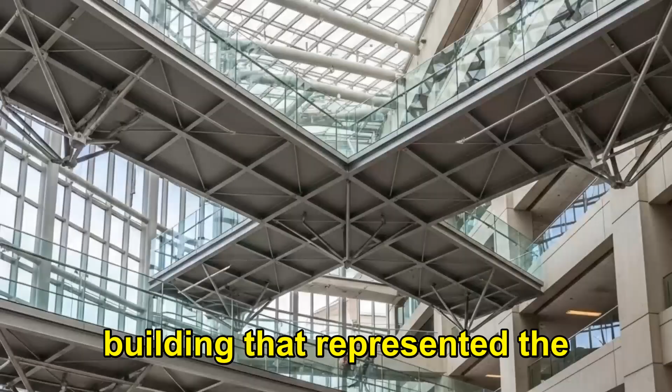The air inside the Hyatt Regency atrium in Kansas City was thick with the sounds of a big band orchestra and the rhythmic shuffling of over 1,600 people dancing. It was July 17, 1981, a Friday evening where the city's elite and everyday citizens gathered for the weekly tea dance. The atmosphere was electric, a celebration of modern elegance in a building that represented the pinnacle of late 70s architectural ambition. But in a single heartbeat, the music was replaced by a sound so violent and alien that survivors would later describe it as a lightning strike inside a closed room.

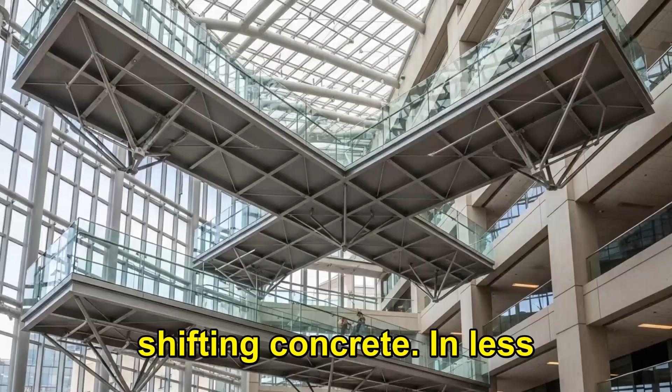A deafening metallic pop followed by a low guttural roar of shifting concrete. In less than 10 seconds, two massive steel and concrete skywalks, weighing tens of thousands of pounds, tore away from their moorings and plummeted into the crowded lobby below. The sheer violence of the collapse was unprecedented. It didn't just fall, it obliterated everything in its path, turning a scene of joy into a wasteland of twisted rebar, grey dust and shattered glass.

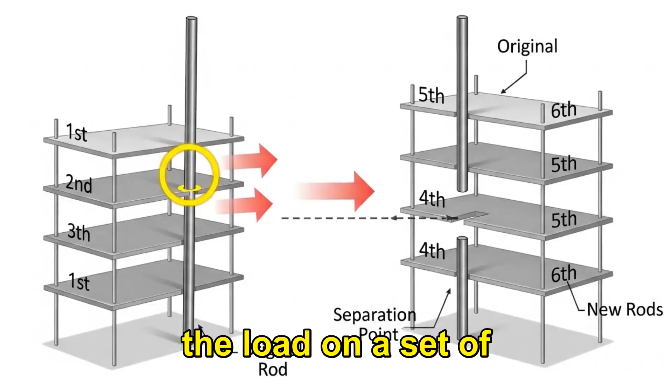We are starting today with the most horrific structural failure in United States history prior to the 2001 attacks. But what we will discover by the middle of this video is even more chilling. The catastrophe wasn't caused by a massive earthquake, a terrorist bomb, or a freak of nature. It was caused by a simple 1-inch change to a technical drawing, a change so seemingly insignificant that it was approved over a casual phone call. Yet it effectively doubled the load on a set of steel nuts that were never designed to hold it.

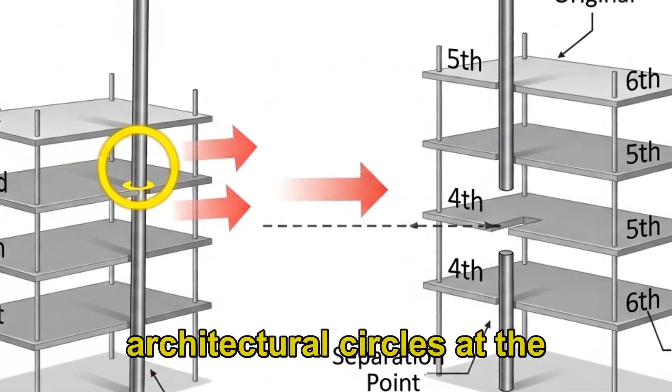The Hyatt Regency was not just a hotel, it was a $50 million statement of intent, a monument to the urban square concept that was sweeping through architectural circles at the time. To put that $50 million in perspective, in today's economy, you are looking at a construction cost exceeding $170 million.

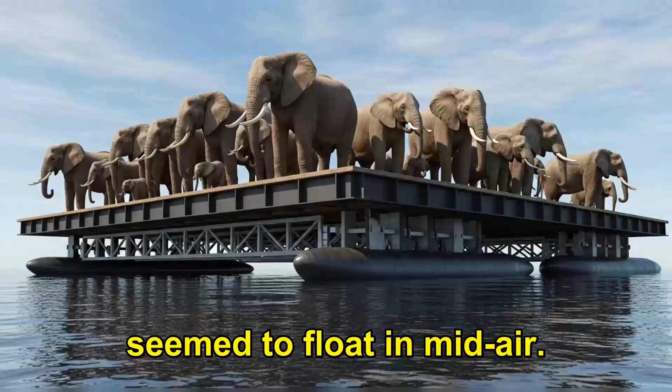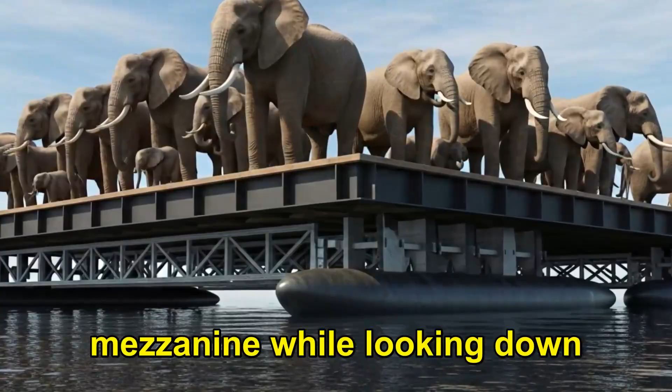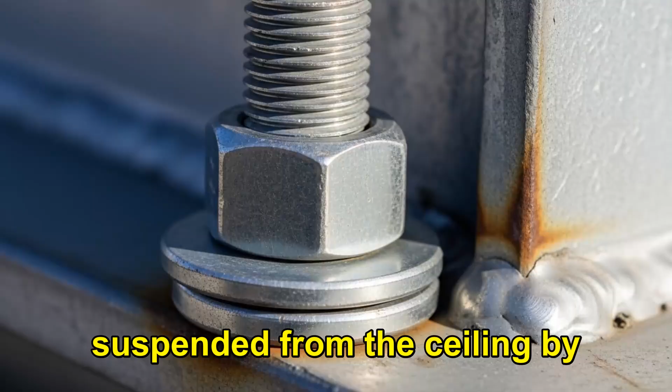Completed in 1980, the hotel featured a staggering 40-story guest tower and a sprawling sun-drenched atrium that acted as the heartbeat of the complex. The crown jewels of this atrium were the three skywalks, marvels of suspension engineering that seemed to float in mid-air. These weren't just narrow corridors, they were 120-foot long, 12-foot wide bridges of steel and concrete designed to allow guests to transit between the tower and the mezzanine while looking down at the spectacle below. To visualize the scale, each of these walkways was roughly the length of 3 standard school buses parked end to end. They were suspended from the ceiling by a series of 1.25-inch diameter steel hanger rods, which looked like thin, elegant needles compared to the massive volume of the space they occupied.

The engineering specifications were, on paper, breathtaking. The second, third and fourth floors were connected by these bridges, which were offset to create a sense of dynamic movement within the 50-foot high atrium. The total weight of the fourth-floor walkway alone was approximately 64,000 pounds. That is the equivalent of 15 fully grown African elephants hanging by threads of steel.

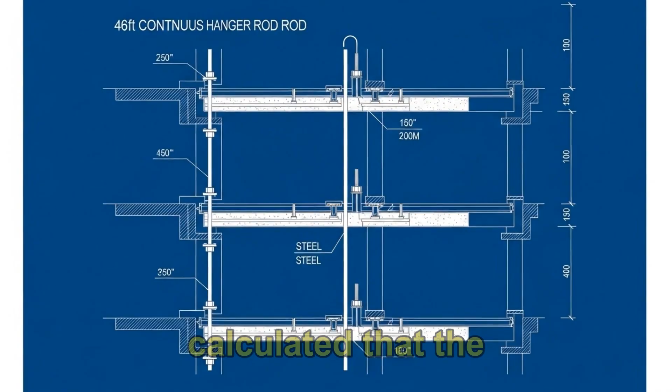When you add the weight of several hundred people standing on those walkways to watch the dancers below, the load capacity requirements become astronomical. Engineers calculated that the steel rods needed to have a yield strength capable of supporting not just the dead weight of the concrete and steel beams, but the live load of a moving, dancing crowd. The public saw a futuristic open-concept masterpiece. The engineers saw a complex web of tension and compression, where every bolt and every weld had to fight against the relentless pull of gravity.

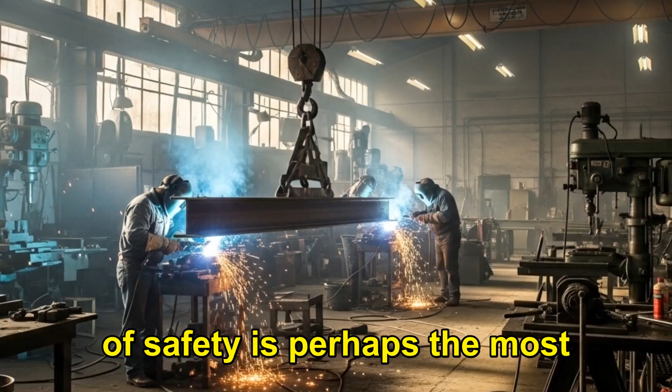Shattering the assumption of safety is perhaps the most difficult part of this story. We often walk into modern skyscrapers, airports and hotels with an implicit trust in the invisible hands of the engineers who built them. We assume that because a building is open to the public, it has survived the most rigorous scrutiny humanly possible. The Hyatt Regency was no exception.

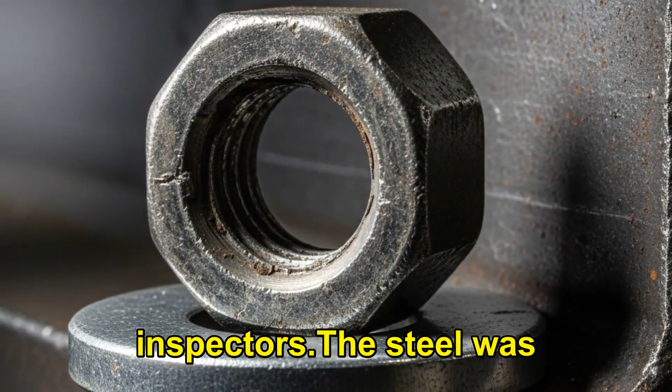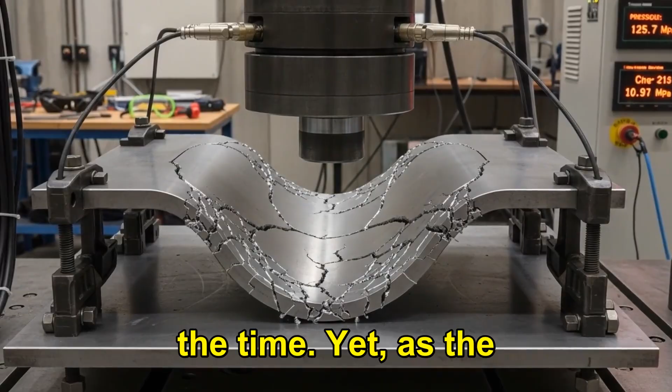It was designed by GCE International, a respected firm with a history of successful projects. It was constructed by Eldridge Construction, a company known for its reliability. The blueprints were reviewed by city inspectors. The steel was certified, the concrete was tested, it was a Class A facility, a flagship for the Hyatt brand, and it had been operating for a full year without a single tremor of concern. The tragedy of the Hyatt Regency is not that it was a cheap or shoddy build in the traditional sense, it was a high-end, professionally managed project that met every legal requirement of the time. Yet, as the band played on that Friday night, the structural integrity of the fourth-floor walkway was already failing.

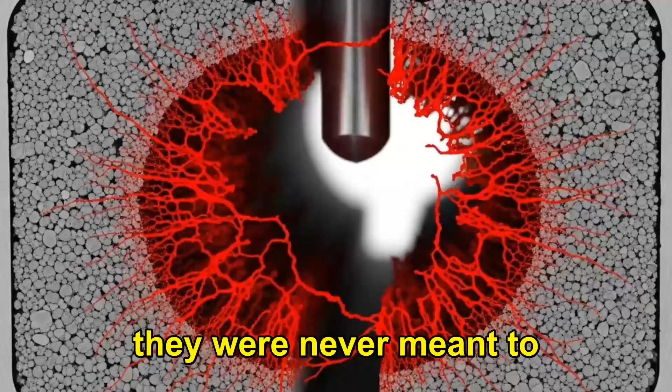The steel hanger rods were quietly screaming under a stress they were never meant to handle, and the legal and certified nature of the building was about to be proven irrelevant in the face of a fundamental law of physics that had been ignored in a draft room hundreds of miles away.

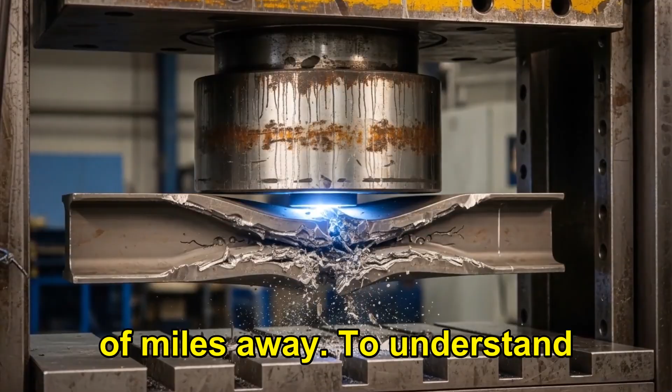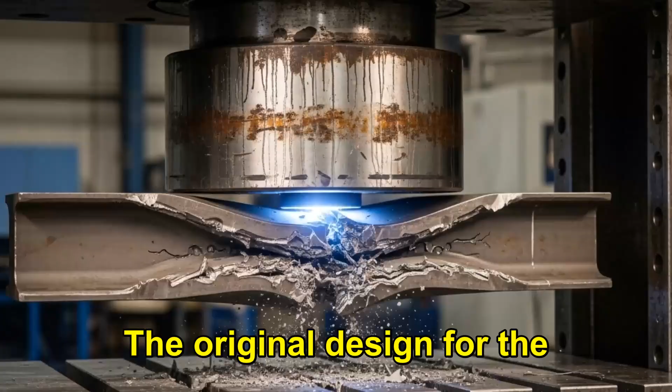To understand why the Hyatt Regency collapsed, we have to look past the velvet curtains and the sparkling chandeliers and peer into the blueprints of the Jack D. Gillum & Associates engineering firm. The original design for the skywalks was elegant in its simplicity.

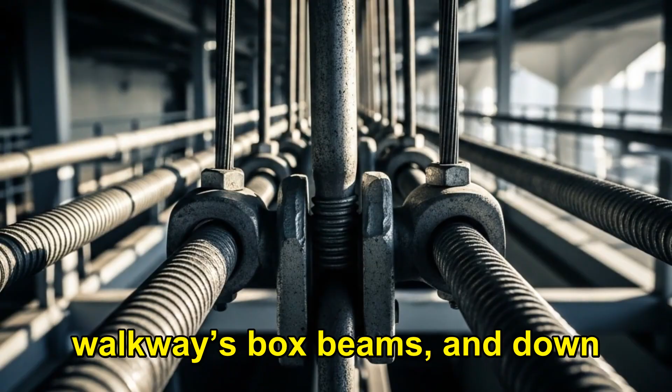It called for a single set of continuous steel hanger rods, each 46 feet long, to run from the ceiling of the atrium straight through the fourth-floor walkway's box beams and down to the second-floor walkway. In this configuration, the fourth floor and second floor walkways were essentially independent passengers on the same rod. Each walkway would only transmit its own weight to the rod.

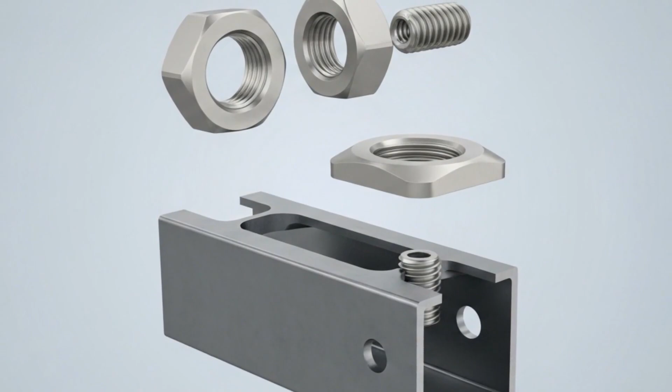It's like two people holding onto a vertical rope at different heights. The rope feels the total weight, but the person at the top isn't supporting the person at the bottom with their own hands. This design met the Kansas City building codes, which required a load-bearing capacity of 151 kilonewtons, roughly the weight of a mid-sized bulldozer, on each connection.

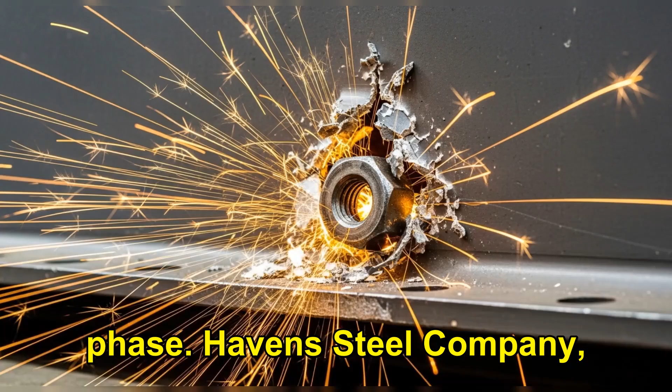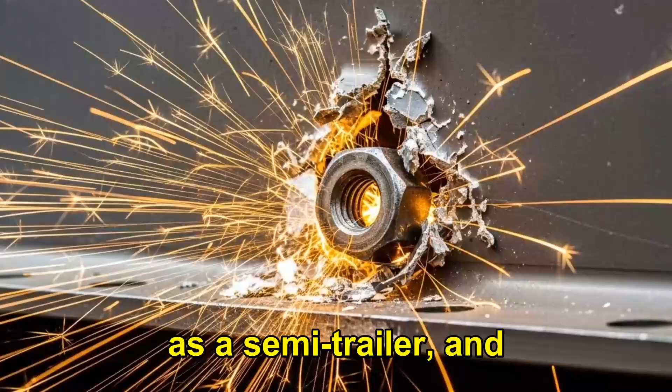However, a massive logistical hurdle emerged during the fabrication phase. Havens Steel Company, the contractor responsible for the steelwork, realized that manufacturing and transporting 46-foot-long threaded rods was a nightmare. These rods were nearly as long as a semi-trailer, and threading the entire length to allow the fourth-floor walkway to be bolted in place was deemed impractical and prone to damage during transit.

Havens Steel proposed a minor modification. Instead of one continuous rod, they would use two separate sets of rods. One set would connect the ceiling to the fourth-floor walkway, and a second set would connect the fourth-floor walkway to the second-floor walkway. To a layman or even a rushed engineer, it seemed like a distinction without a difference.

They believed the total load on the ceiling remained the same. What they failed to realize was that they had fundamentally changed the physics of the connection. Under the new double-rod system, the fourth-floor walkway was no longer just a passenger, it became a middleman.

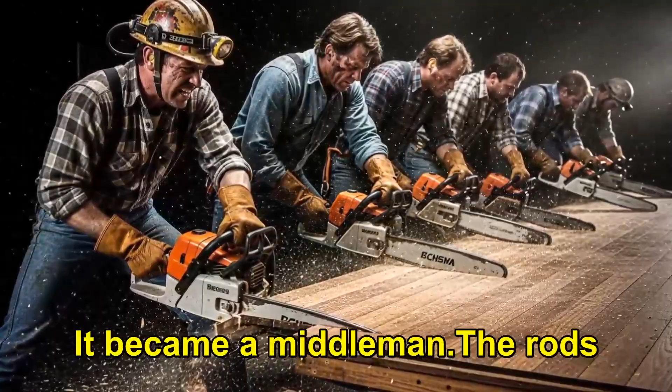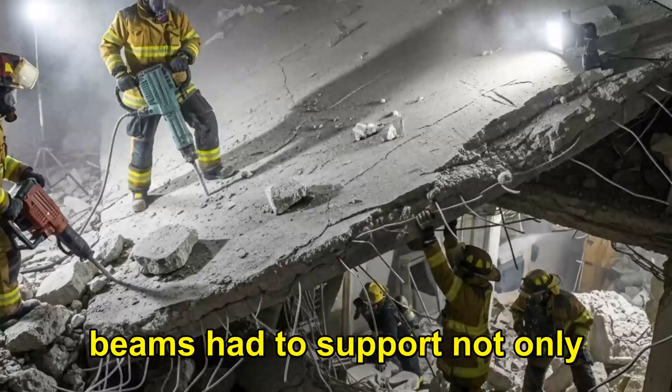The rods supporting the second floor were now bolted directly to the box beams of the fourth floor. This meant that the fourth floor beams had to support not only their own weight and the weight of the people on them, but also the entire weight of the second floor walkway hanging below them. By making this change, the engineers inadvertently doubled the stress on the fourth floor connection.

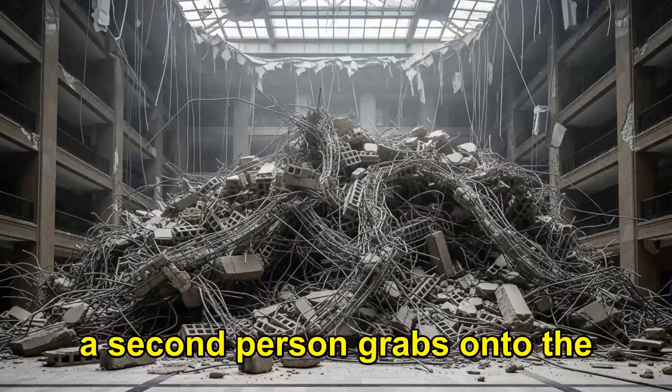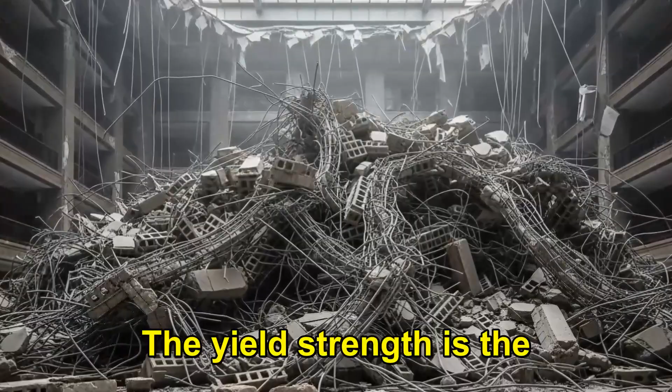Imagine a person hanging from a ceiling bar, and then a second person grabs onto the first person's ankles. The first person's grip now has to hold two bodies instead of one. In engineering terms, the load capacity of the connection was pushed far beyond its yield strength. The yield strength is the point at which a material stops acting like a spring and starts acting like modeling clay. It deforms permanently and eventually snaps.

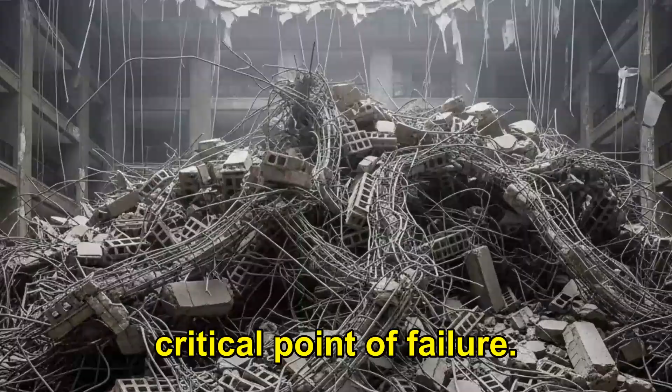The box beams themselves were a critical point of failure. These were not solid blocks of steel, they were built-up members created by welding two C-shaped steel channels together toe to toe. To visualize this, imagine taking two staple removers or two U-shaped pieces of metal and taping their open ends together to form a hollow square.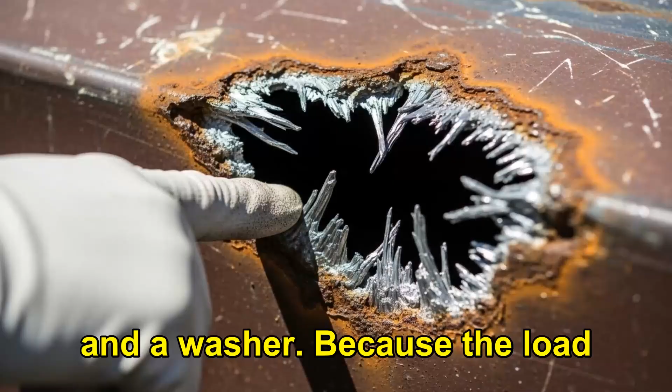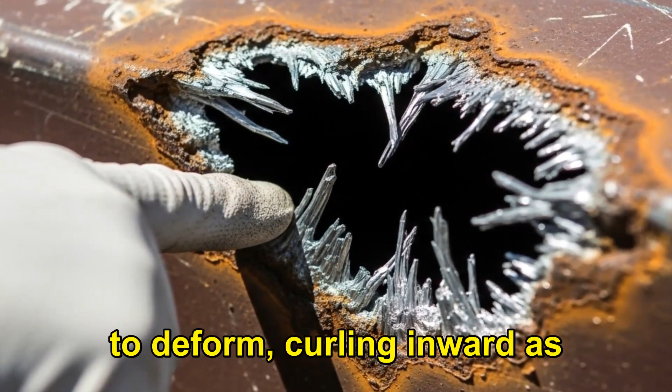The hanger rods pass through a hole drilled in the center of these welded beams, secured by a nut and a washer. Because the load was now doubled, the stress at the point where the nut pressed against the beam was catastrophic. The steel started to undergo local buckling. The bottom of the box beam began to deform, curling inward as the nut literally tried to pull itself through the steel plate. This is what we call shear force, the tendency of one part of a structure to slide past another.

What makes this even more tragic is the chain of human decisions. This design change was communicated via a phone call and a few revised sketches. It was never formally recalculated.

The lead engineer, Jack Gillum, later testified that his firm did not perform the math on the revised design because they assumed the fabricator, Havens Steel, had already checked it. Conversely, Havens Steel assumed that since the engineers approved the change, it was safe. It was a classic not-my-job loop that left a ticking time bomb in the hotel atrium.

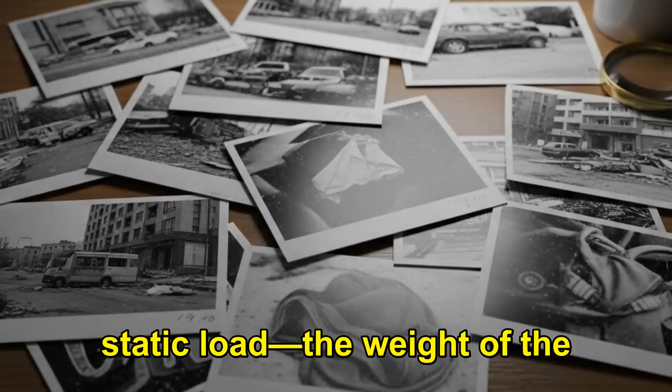During the final construction, the connection was so weak that it barely met 30% of the required safety code for a static load, the weight of the bridge alone. When the live load of the dancing crowd was added, the angle of inclination of the stress changed, and the metal began to fatigue instantly.

We're talking about a structure that was essentially failing from the moment it was finished, held up only by the narrowest margin of structural integrity. The first warning sign wasn't a crack or a groan, it was the subtle, invisible bending of steel that had already reached its limit before the first guest even checked in.

At exactly 7:05 p.m., the structural tension that had been building within the fourth-floor skywalk reached its breaking point. For the 1,600 people in the lobby, the first sign of the apocalypse was not a visual one, but a sound. A sharp metallic crack that echoed through the six-story atrium like a gunshot from a high-caliber rifle. This was the sound of the steel box beam finally surrendering.

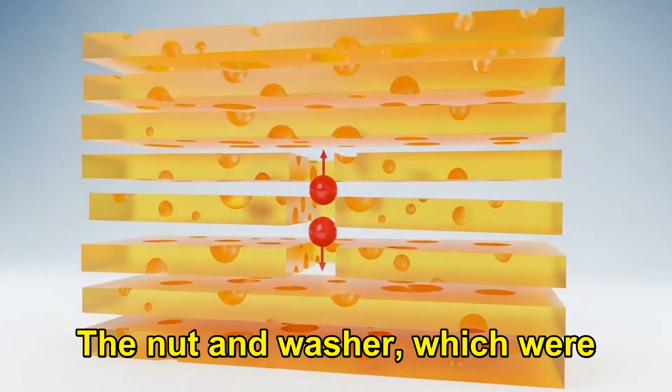The nut and washer, which were meant to hold the weight of two bridges, literally tore through the bottom flange of the fourth-floor beam. In the world of structural engineering, this is known as a pull-through failure, and once it began, there was no stopping it.

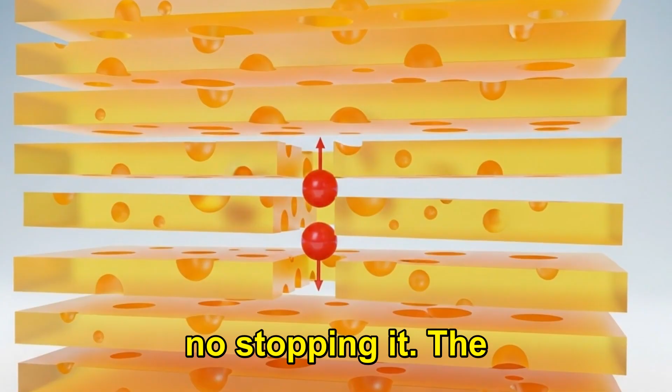The fourth-floor walkway didn't just tip or lean, it dropped straight down, perfectly level for a fraction of a second before it slammed into the second-floor walkway directly beneath it. The combined mass of both concrete and steel structures, now weighing over 100,000 pounds, overwhelmed the remaining hanger rods.

The entire assembly pancaked. It took less than 10 seconds for the skywalks to transition from architectural marvels to a multi-ton heap of wreckage resting on the lobby floor. The immediate aftermath was a scene of visceral, high-definition horror that no guest was prepared for.

As the dust, a thick, choking cloud of pulverized concrete and plaster, began to settle, the silence was broken by the sound of the hotel's fire sprinkler system. The impact had severed the main water lines, and thousands of gallons of water began to flood the lobby, turning the debris field into a drowning hazard for those trapped beneath the slabs.

Survivors described the tea-dance music being replaced by the rhythmic hiss of escaping steam and the frantic screams of the injured. Dr. Joseph Waeckerle, the director of emergency medicine at a nearby hospital who happened to be at the event, immediately stepped into the chaos. He described the lobby as a war zone, establishing a triage center on the blood-slicked floor.

Rescuers had to use chainsaws to cut through the heavy wooden dance floor and jackhammers to break apart the massive concrete slabs. Because the hotel was built like a fortress, heavy machinery couldn't be brought in easily. They had to use the hotel's own luggage carts to ferry the wounded to waiting ambulances.

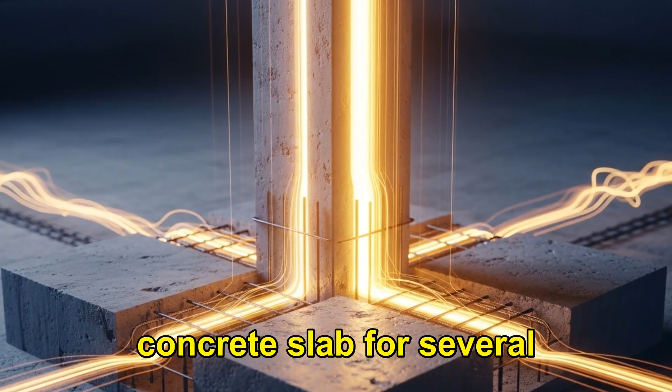The stories of survival were miraculous yet haunting. One man was found alive after being pinned under a concrete slab for several hours, saved only because a void had formed near a structural pillar. But for most, the sheer force of the pancaking effect meant that death was instantaneous.

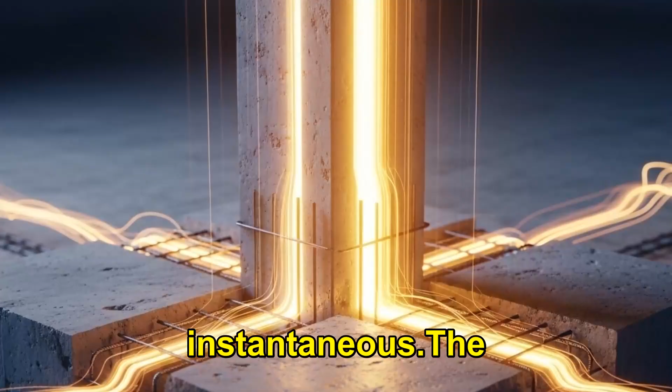The sheer scale of the tragedy meant that Kansas City's morgues were overwhelmed, and the local convention center had to be repurposed to hold the bodies of the victims.

As the sirens faded, the forensic investigation began, led by the National Bureau of Standards, NBS. This was one of the most exhaustive engineering autopsies ever conducted. Edward Pfrang, the lead investigator, didn't just look at the wreckage. His team reconstructed the failure using sophisticated computer models, a rarity in 1981.

They discovered that the as-built design, the one with the doubled rods, was so fundamentally flawed that it barely supported the weight of the bridge itself. In fact, their calculations showed that the connection was capable of supporting only about 30% of the load required by the Kansas City Building Code. It was a bridge that was destined to fall from the moment the last bolt was tightened.

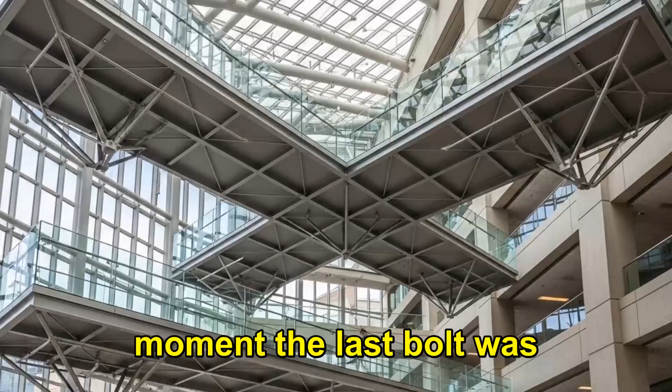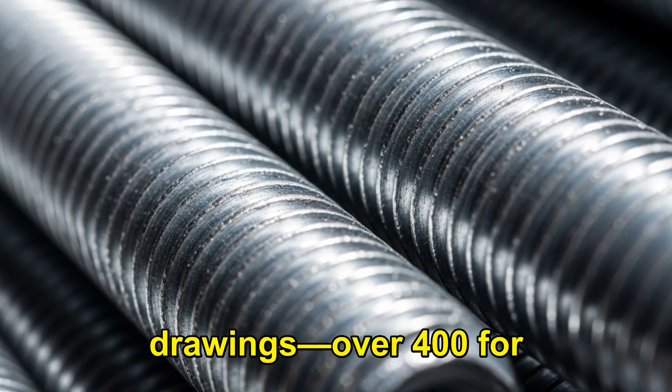The investigation then turned to the paper trail, and this is where the professional disputes became toxic. The Missouri Board for Architects, Professional Engineers and Land Surveyors filed a complaint against Jack Gillum and Daniel Duncan, the lead engineers. The engineers argued that they had been misled by the steel fabricators, Havens Steel, and that the sheer volume of drawings, over 400 for the project, made it impossible to catch every detail. They claimed that telephone approval of the design change was a standard industry practice.

The board disagreed vehemently. In a landmark ruling, the judge found the engineers guilty of gross negligence, misconduct and unprofessional conduct.

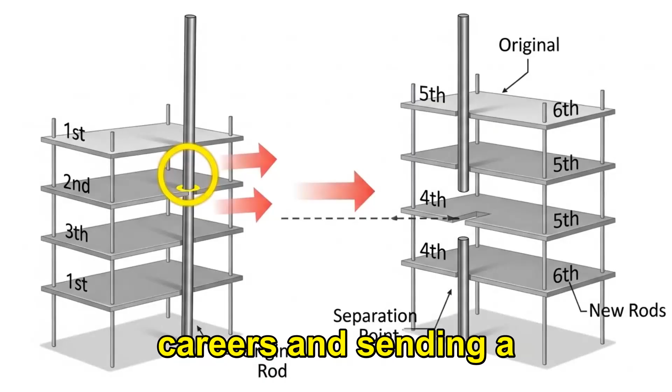It was determined that as the engineers of record, the ultimate responsibility for the safety of the structure rested solely on their shoulders. They couldn't delegate the laws of physics to a subcontractor. Both Gillum and Duncan had their engineering licenses revoked in the state of Missouri, effectively ending their careers and sending a shockwave through the entire construction industry. The dust settled on the lobby floor, but the shockwaves from the Hyatt Regency collapse were just beginning to dismantle the very foundations of the American engineering profession.

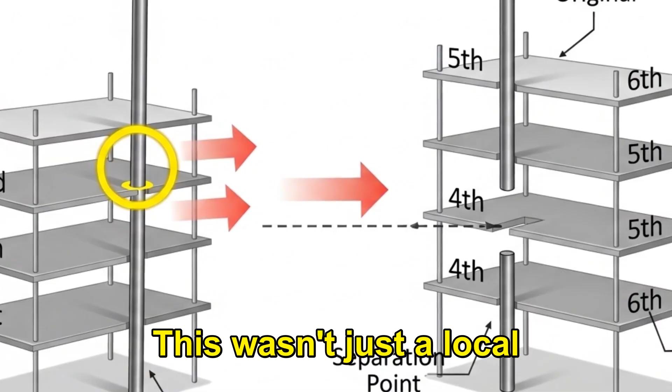This wasn't just a local tragedy, it was a global wake-up call that fundamentally rewrote the laws of structural responsibility. Before 1981, the division of labor between an engineer of record and a steel fabricator was a murky gray area. Many engineers viewed shop drawings, the detailed sketches produced by contractors, as minor administrative tasks rather than critical structural documents. The Hyatt collapse changed that forever.

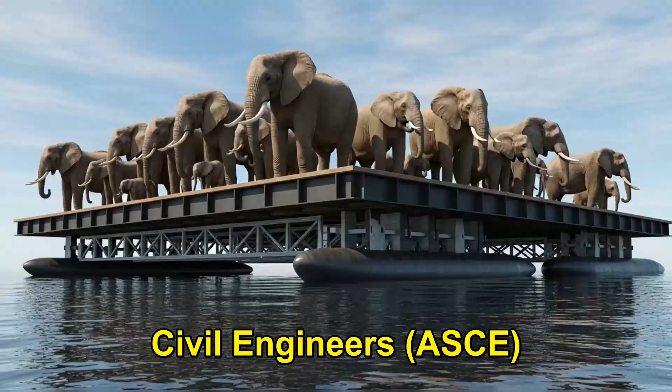Today, the American Society of Civil Engineers, ASCE, maintains a strict policy born directly from this carnage. The engineer of record bears full, non-delegable responsibility for the structural integrity of the entire project, including every single connection, bolt, and weld, even those designed by subcontractors. This is known as the Hyatt Rule, and it is the reason your modern office buildings and bridges are scrutinized with a level of intensity that would have been unthinkable in 1979.

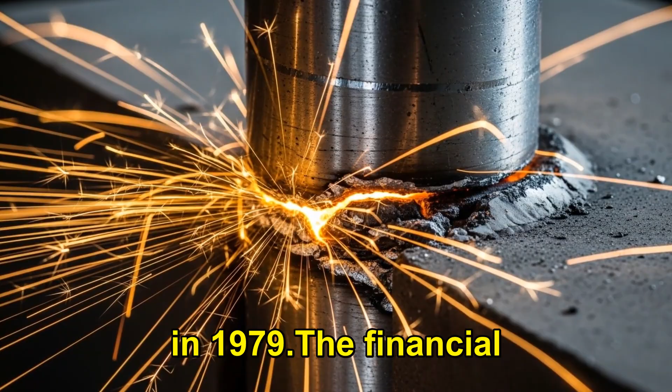The financial aftermath was just as staggering as the physical destruction. Over 2,000 lawsuits were filed against the hotel, the engineers, and the contractors, resulting in total settlements exceeding $140 million. To understand the scale of that payout, in today's currency that is nearly $500 million, a $500 million penalty for a 1-inch design error. But the true legacy of the Hyatt Regency is not found in bank accounts.

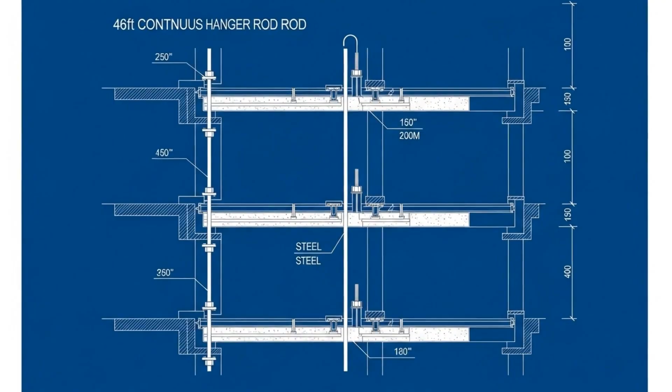It is found in the ethics curriculum of every engineering university on the planet. The collapse is taught as the holy grail of professional ethics, a cautionary tale about the normalization of deviance. This is a psychological phenomenon where people become so accustomed to small, harmless shortcuts that they eventually stop seeing them as risks. The engineers in Kansas City didn't wake up intending to kill 114 people. They simply became comfortable with the idea that someone else was checking the math.

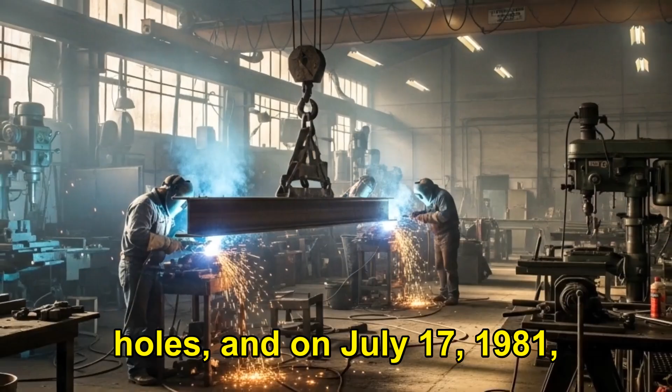It was a failure of the Swiss cheese model, a theory where multiple layers of defense all have tiny holes, and on July 17, 1981, those holes lined up perfectly.

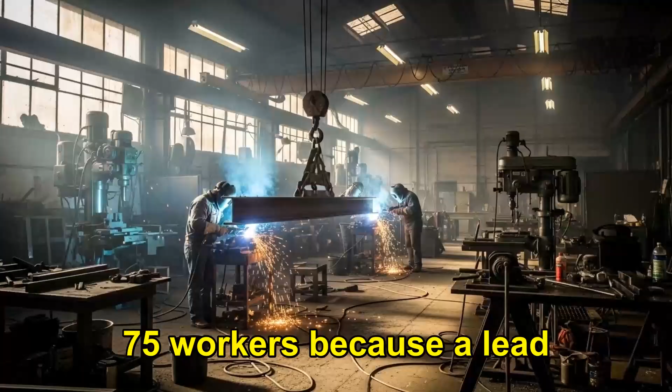The irony is that we had seen this before. In 1907, the Quebec Bridge collapsed during construction, killing 75 workers because a lead engineer, thousands of miles away in New York, insisted on using his own calculations over the concerns of the man on the ground. We didn't learn then. In 1879, the Tay Bridge in Scotland plummeted into the sea because wind loads weren't properly calculated. We didn't learn then either.

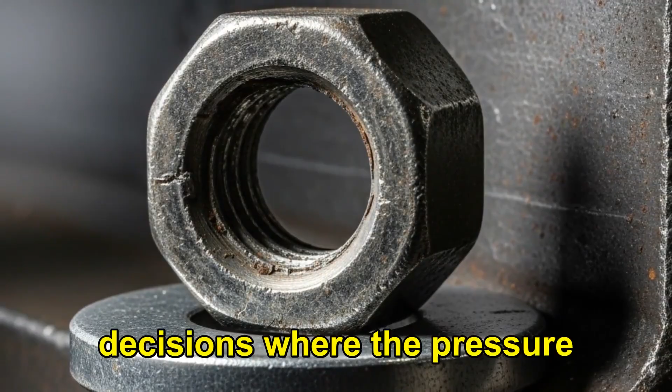The Hyatt Regency was a mirror of systemic decisions where the pressure of a construction schedule, the need to get it done, overrode the absolute necessity of a peer review.

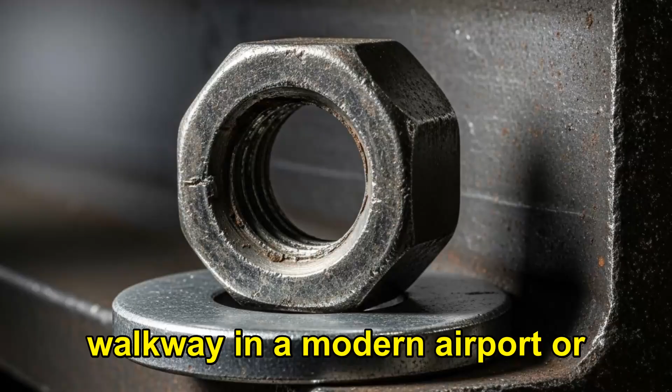Every time you walk across a suspended walkway in a modern airport or mall today, you are benefiting from a factor of safety. This is an engineering buffer where a structure is built to hold 3 to 4 times its maximum expected weight. In the Hyatt's 4th-floor walkway, that factor was effectively 0.6. It was failing even when it was empty.

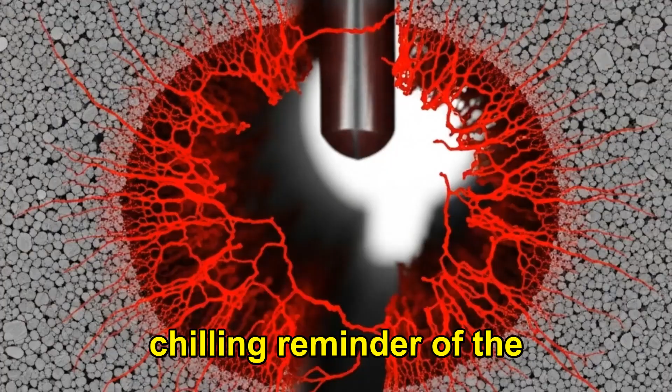Philosophically, this disaster serves as a chilling reminder of the fragility of human ambition. We build higher, wider, and more elegantly than ever before, but our structures are only as strong as the communication between the people who design them.

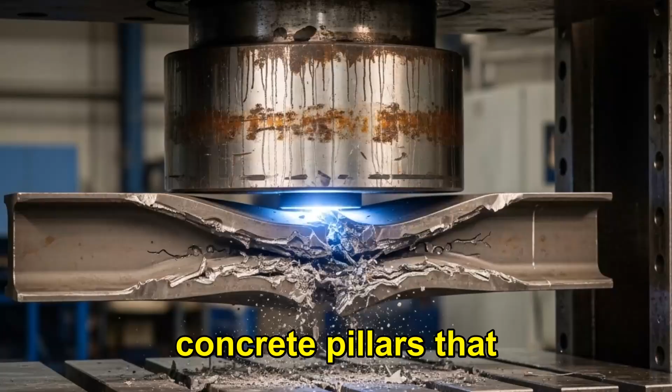The Hyatt Regency, now operating as a Sheraton, stands today as a beautiful, safe, and fully renovated hotel, but if you look closely at the atrium, you will notice something different. There are no suspended walkways. The current bridges are supported by massive, visible concrete pillars that go straight into the earth.

It is an architectural admission of guilt, a permanent physical reminder that when we try to cheat the laws of physics for the sake of aesthetics, gravity always wins the final argument.

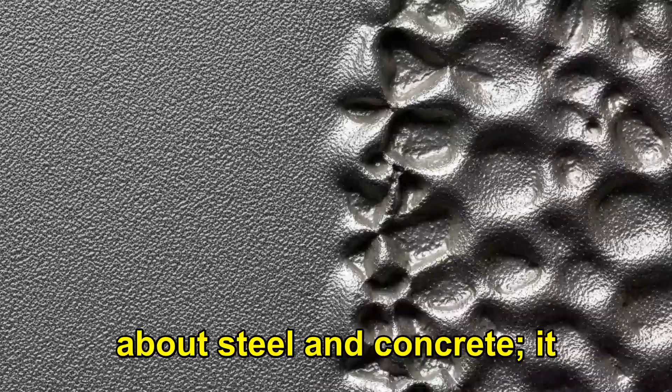We must never forget the 114 lives lost, not as a tragedy to be mourned, but as a lesson to be studied. Engineering is not just about steel and concrete, it is a sacred contract of trust between the builder and the public. When that contract is broken by a single phone call or a skipped calculation, the results are written in blood.